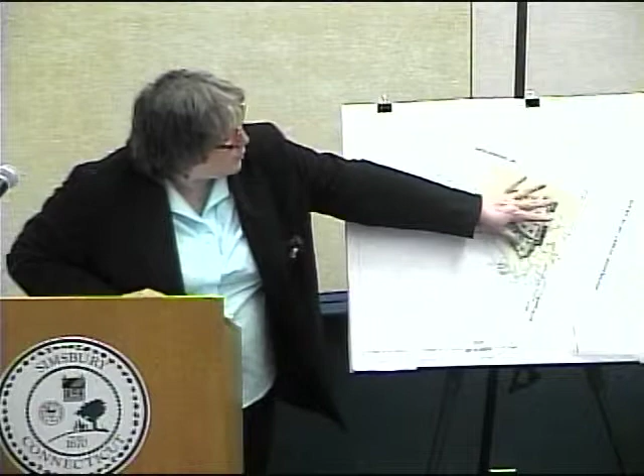We're looking at this corner for improvements for the Simsbury Veterans Memorial that would be created at streetscape level. So what we do is fill in this particular area, extend off the existing sidewalk, and create a gathering area that would be located in this corner.

This is a smaller version of our previous designs, in case anybody was thinking in terms of context. Part of the reason is that according to the Simsbury Center Code, no vertical structures, which our columns would be considered, or the flagpole would be considered, within 10 feet of the property line.

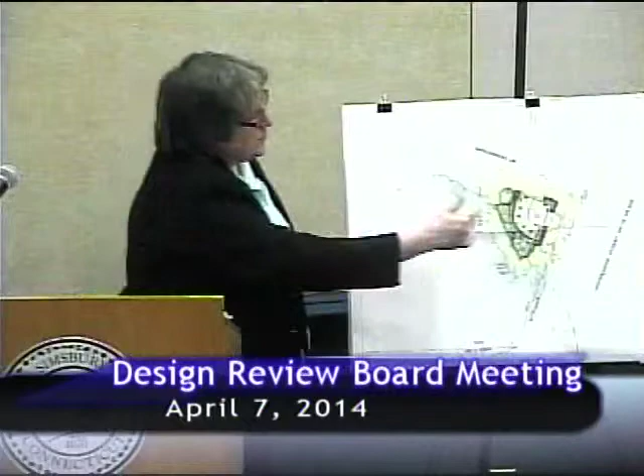So everything has sort of been pushed back a little bit, not as much as you would think, but what we did was reduce the area between the sidewalk and the plaza so that there's more of a separation. So your sidewalk, there's an extension sidewalk and then the plaza area.

So it's a little bit, it's at street level, but as we were requested to do from the previous design review board, there's more of a separation. Everyone felt it was a little too close to the existing sidewalk.

As part of the previous discussion from the October letter, there was a discussion about how this project interfaces with the potential for a future pond, which is located in the charrette plan in this general vicinity over here.

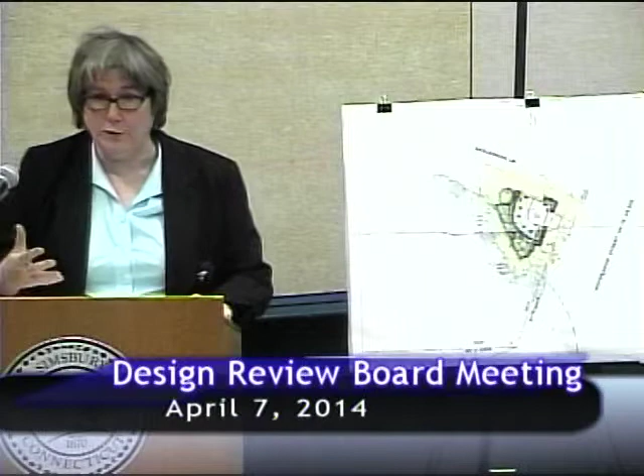In order to understand that, because the pond does not exist, we actually had to put together some preliminary ideas of how the pond might be laid out so that we could look at what those options were. When we looked at that, our original design assumed that the pond level would come right up to the back here of the retaining wall.

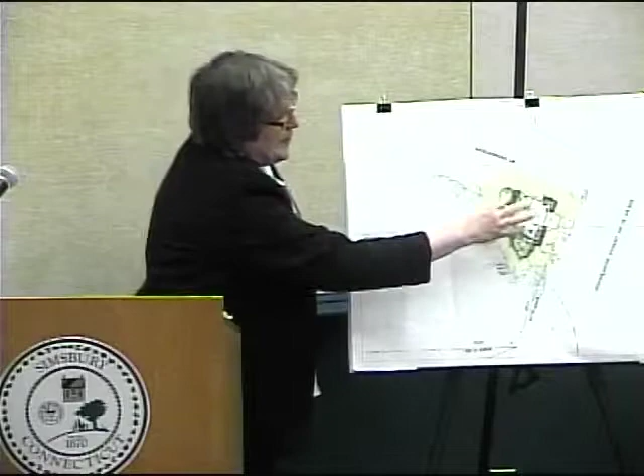We discovered that one of the concerns that came up, not so much in the discussion with Main Street but with a whole bunch of different people, was where do we actually get a sidewalk if this pond was in place, down at the water's edge. The water's edge would be located about 5 or 6 feet below the existing sidewalk, because that's how it would work out. There's only one place you can get a sidewalk along that, down in this area and up around here.

So if we put our retaining wall in, with the water level coming up to that, there'd be no opportunity for a sidewalk at all. So we separated the two issues and created the Veterans Memorial up here with a slope that comes out the back, so that when the sidewalk goes in, it's just a matter of a small regrading to interface the two. You can still put the sidewalk in and it will not interfere in any fashion.

I met, when we did this, with both the previous town engineer, Rich Sawicki, as well as the current town engineer, Jeff Shea, to look at this and have them concur with the conclusion I was drawing, which is that we were not interfering with whatever might happen next.

One of the questions the previous board had asked was, if the pond was there, would you design something differently? So I actually had to design a memorial and presented that to the veterans, and the veterans rejected it. That was not what they wanted. They did not want something down at a lower level off the streetscape.

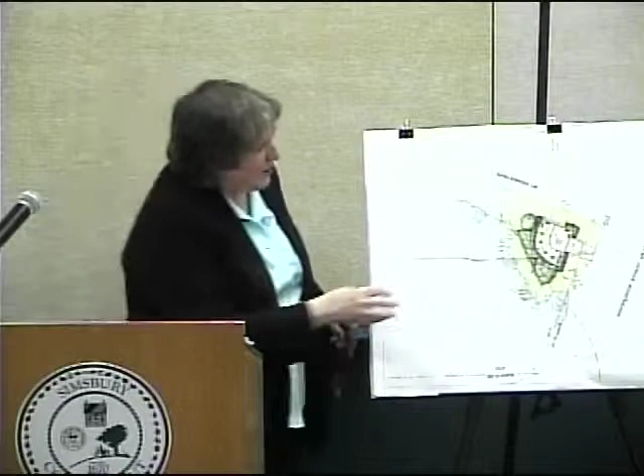But Conservation Commission suggested that we might want to change those or add mountain laurels, which makes sense to me as well, and would still accomplish the same task. So we'll probably put PJMs at the top and then mountain laurels down lower.

I think that ends my presentation. I'd be happy to answer the questions.

Is the sidewalk not part of this? Correct, it's an existing sidewalk here. No, the one that goes behind the memorial is not part of this? No, that's correct. The pond itself, the sidewalk that goes behind here, that's just done for illustrative purposes.

To answer the question to Hiram, the pond this century? Well, you know, I keep hearing about it, Tony. I thought we were closer about 6 months or a year ago, but I don't have a specific timeframe now. Obviously, we'd have to raise some money for it and obviously go through the permit process as well. So I don't have a specific timeframe.

Another question, I guess, to Hiram. The connection between the parking lot at the Boy Scout house, was that going to be a roadway? It's now a walkway. It's never going to be a roadway? That's my understanding, that's correct. I had always lobbied for a suspension bridge, I just thought that would be so cool. Yeah, okay, it's a walkway right now.

So I have a question. So the access to the memorial is the sidewalk from the street sidewalk. Correct, that's correct. Where is it assumed people are going to park if they want to come and see this? So they're going to park over at the library, and there's no thought that they have to walk on the access road to get to the memorial, or is there some way to get from that parking without walking in the road?

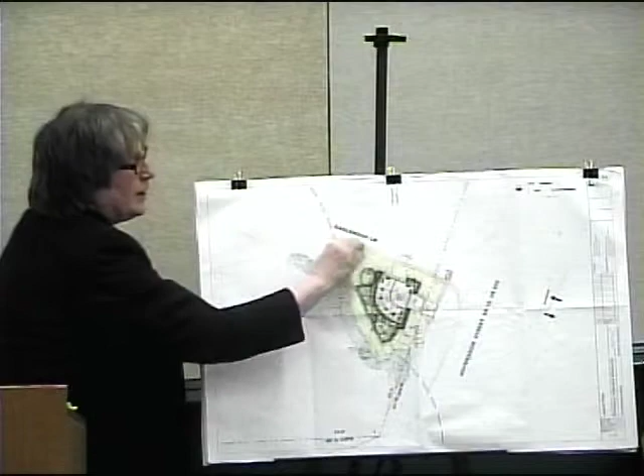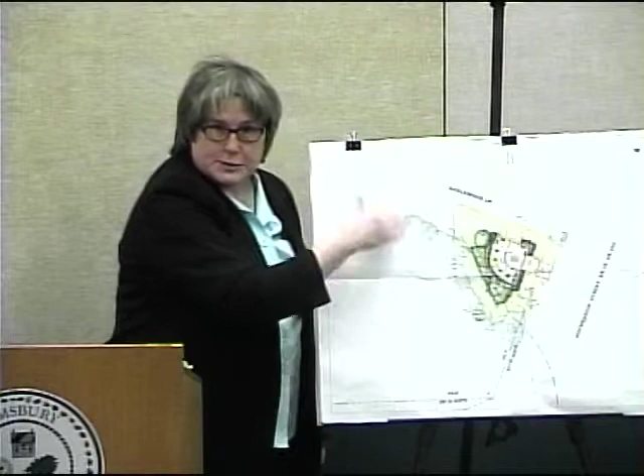Right now, you can walk on the grass. It's level but we did not extend a sidewalk here primarily because there were too many things that were in play at the time. The library was talking about extending the parking, whether they wanted it or not, because this was on the library board's property. So the idea was that for the most part, you park here or walk on the grass, and it's a direct, easy route. It's mowed, it's level, it's not difficult.

When it comes from the veterans, you're going to have the pavers, people are going to be able to buy a paver and have their name on it? There will be a fundraising effort where there will be inscriptions on the pavers. Is that in the memorial? On the ground plane in this area and in this area here.

In my opinion, names of commercial... Names of veterans. Pardon? Names of veterans. Oh, not the name of the person who put the brick there? Correct, correct, it's not going to be LADA PC land planners.

Okay, so it's not going to be awful commercial? Yeah, someone in town who has a relative who's a veteran might want to purchase one of these pavers and have that for the veteran. Okay, yeah, all right, that's okay. Yeah, so I could, my dad who served in submarines, I could put his name on that. Yes, okay, I understand, that's better.

I'm with John, the parking seems a little difficult. Only thinking of guys in wheelchairs and guys on crutches. Access to it seems difficult for somebody. My father's disabled, so for him to get here and park and walk down, he wouldn't walk in the grass.

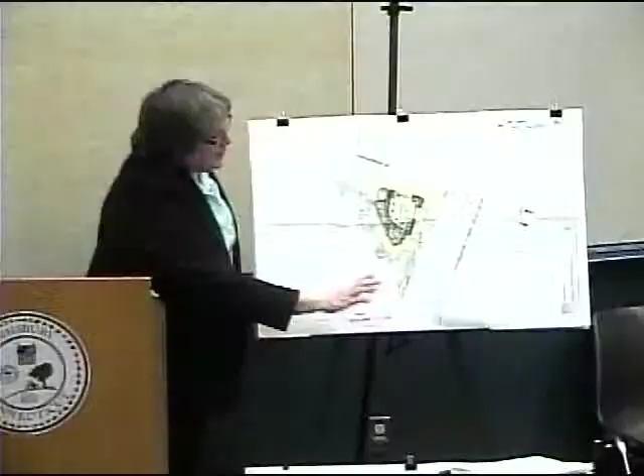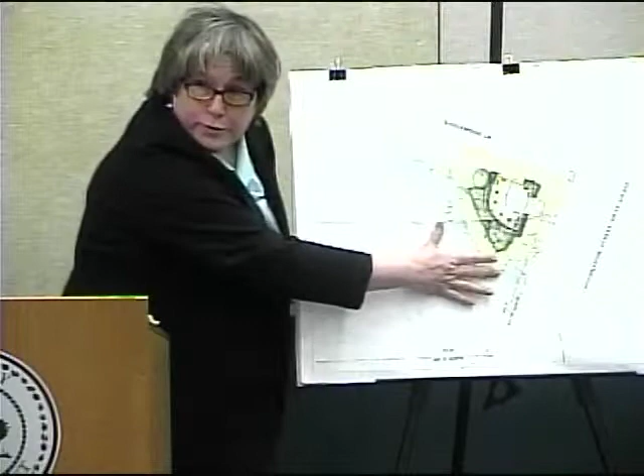The idea here was that we were not going to get a 360 degree, or even 180 degree view. That was never the intent. So what will occur is, as you're coming this way, the trees will block your view all the way past this one here. At that point, you'll see the flagpole, and then you'll probably continue on.

You might catch a glimpse of it out this way, but that's intentional, because this area, coming from this direction, is a particularly difficult traffic scenario. If you do catch a glimpse of it, your eye will come in here, and then there will be four columns, but you'll probably only see, with the perspective, two of them, because the others line up right behind.

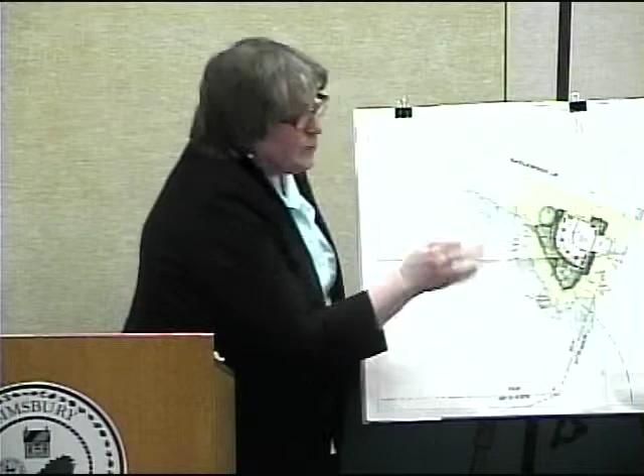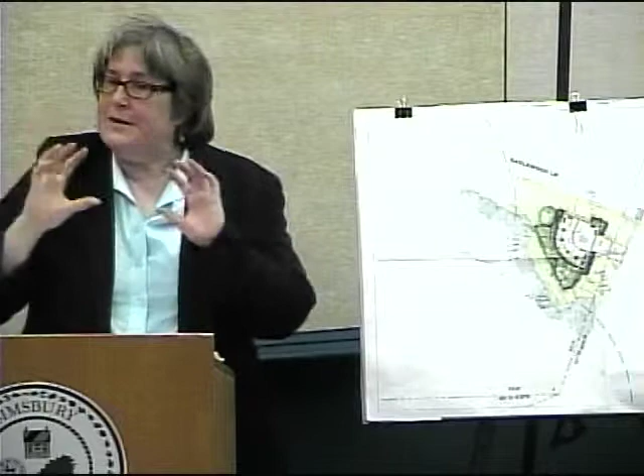We don't necessarily think that's a bad thing. But with the flagpole, that's one of the reasons we pulled it out front, so it would be a sort of understandable area. If somebody said, I'll meet you at the library, they'd know it's where the flagpole is. This isn't intended to be in your face or readily visible from that particular direction.

And Hiram, the height is all fine, it meets the codes now? It does. The height of the columns? They reduced the height of the flagpole and also moved the columns back, so setbacks are okay. Is there any ADA requirement? It's all handicap accessible, the whole thing.

I took those as steps. No, those are just paver bands, there's no steps. It's all 1.5%, 2% max grade. I just wanted to make sure I wasn't missing a step. No, I understand.

I know we're sort of late to this since it started with the previous board. So could you clarify what sorts of functions might be here, or will there not be functions? Is this going to be where Memorial Day will focus? Not at this time, Memorial Day continues to be at Eno Hall. There's a lot of logistics associated with moving the parade down to this area that have to do with street control and that sort of thing, so that's something that should happen in the future.

Somebody, the police have to deal with that, and that's kind of a compelling reason why we're not proposing that at this point. We literally have no control over that. We do anticipate a small ceremony for Veterans Day in November, and it would just be a short speaker or something of that nature.

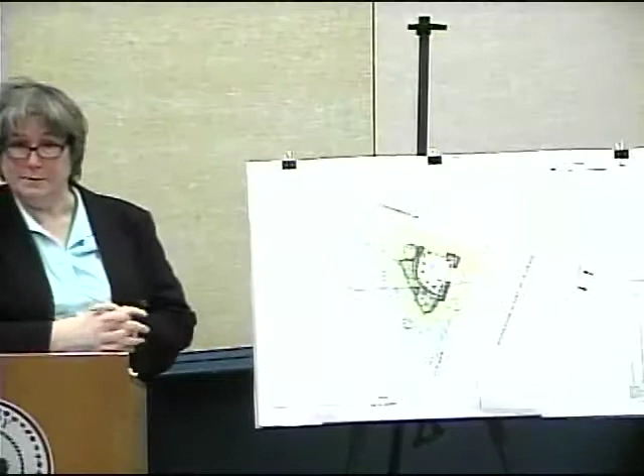Once you get bigger than that, then you need police control. That would be a scheduled event, should anything like that happen, but there's nothing currently scheduled. If something needs to be bigger than that, it will probably be indoors, at Eno or someplace of that nature.

And that memorial at Eno, by the way, some people have asked us before - that will stay in place, because that's part of the overall Eno front lawn.

So Terry, do you guys have funding for this already? We have partial - I'll defer that to Bruce - but I believe we have partial funding, and we haven't engaged in full fundraising because every time we think that we're good, the design changes.

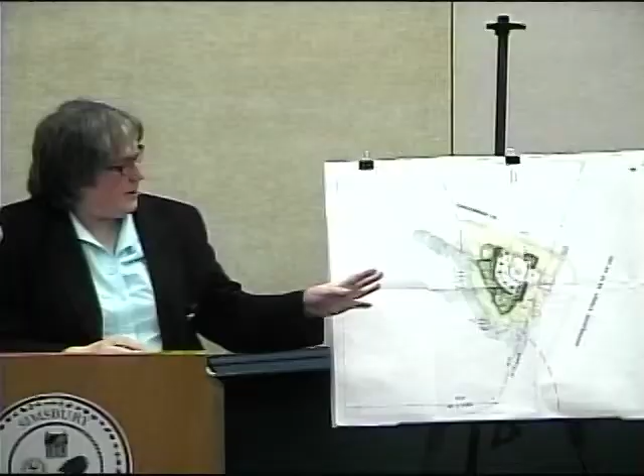What's your process? Once it gets approved, what's your process to move forward? What we anticipated, assuming that we'll get through this board, we have to go to zoning just for zoning approval. We would like to be able to announce at Memorial Day that it's good to go, and that's when we do the fundraising, probably through the summer and the fall, and probably start next spring. What's the estimated cost? It's somewhere around $150,000.

Hiram, is the Martin Luther King Memorial thing going forward? I really don't know. I've asked some people from the Historical Society about that, and I asked if they were ready to share any sketches, and I was told they weren't. So I haven't seen anything on that at all, frankly.

My understanding is, based on some of the signs that I see, is that fundraising is going on for that. But honestly, that's all I know about at this time.

We had many similarities between some of our previous designs and the Martin Luther King Memorial. Those similarities are less now. We took the glass panels out. There's a number of different things - more modest than that.

The one that Jay Willard did is a little more modest. It has more pieces associated with it. This got much simpler, so now it's just the 4 columns.

Who maintains this? The town will ultimately maintain it. At this point, part of the reason why we're going with the materials that we're choosing is to minimize any potential long-term maintenance. It's flat, it's grass, there's easily maintainable vegetation.